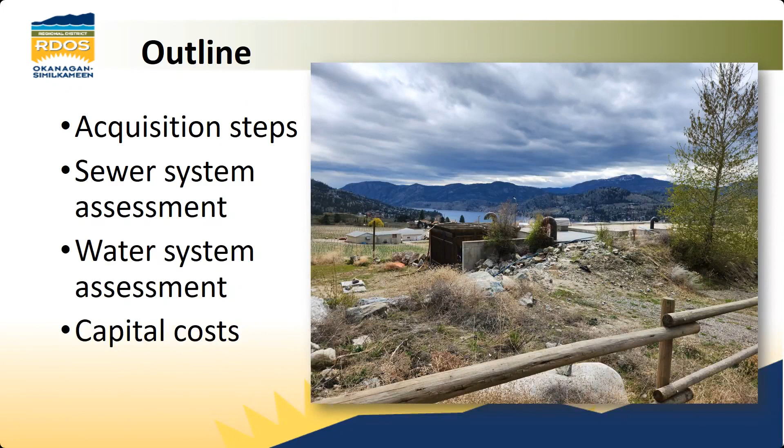Okay, so the acquisition process, there's many steps to it. The very first thing to initiate it is a request to the RDOS to look at the system, and that's been received. We've proceeded with the engineering and financial assessments, which was the main first step, so we need to understand what the current conditions are and what upgrades would be required.

After that, we start working on all of the other details: the liabilities, the risks, and discussing things with the province and all of the other parties involved. Then we go through the other parts of the process, such as when we would come out and do the assent process, the bylaws, and then work on the transition plan. So right now...

I'm going to be presenting on the engineering and financial assessments. This is where we look at the existing infrastructure, and all the capital costs required to bring the systems up to compliance to meet the current regulatory standards. Well, I have to finish getting it ready here, because I thought I was all ready to go, but we're still... Hey, Danny, can you mute everybody?

Hey, Danny, can you mute everybody? All right, I think they got that, yes.

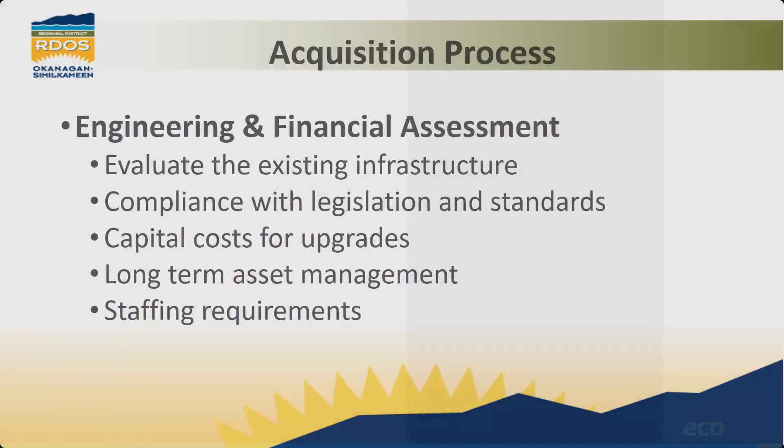Okay, so we start with the Vintage Views wastewater system. It was designed to service 112 lots. Right now, there's 78 connected up to it, and there's 34 empty lots in the Vintage Views sewer service area. Right now, it has a capacity of 65 cubic meters a day because it's only got one module built in right now. It was designed to have 3 modules, to handle the anticipated flow of about 195 cubic meters a day at full build out.

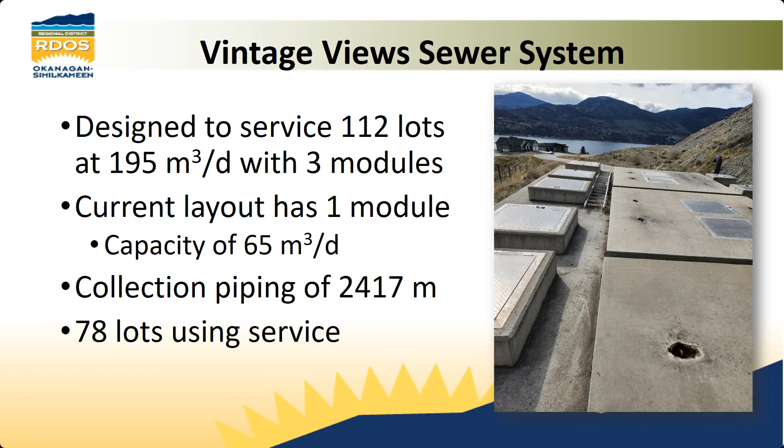So Ecora did an analysis and looked at what the demand would be based on the typical wastewater that would be generated. The subdivision servicing bylaw that the RDOS has, bylaw 2000, which was active last year when the assessment was done, sets the daily need of every person at 450 liters per capita per day. Using that and the estimated number of people per house, Ecora generated a system design flow of 116 cubic meters a day, which is actually less than what the system was initially designed for.

Just as a side note, our subdivision bylaw was recently updated, and our actual new flow is actually 350 liters per capita per day, so we can actually increase the number of connections there.

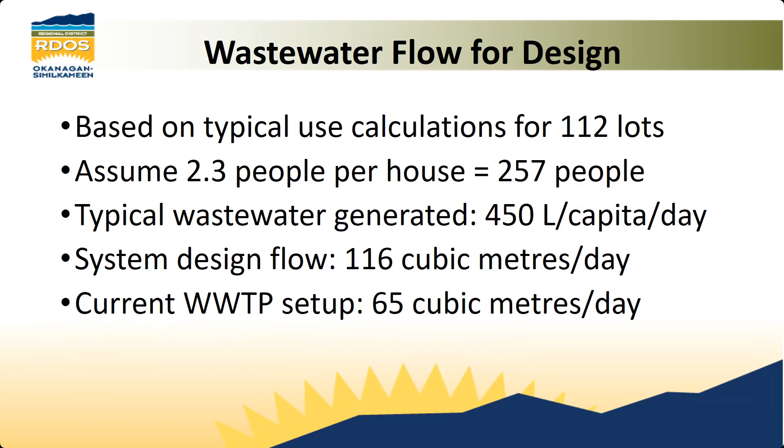So here's an image showing how different parts of the area were connected into the sewer. The first part to come on was the Apple Court area, which includes Apple Court, One Quail Place, and Apple Road. It comes down by gravity into the wastewater treatment plant there.

And then there's 3 areas of Vintage Views that have been built over the years. Phase 1 was built around 2008, and then phase 2 and 3 followed over the next decade.

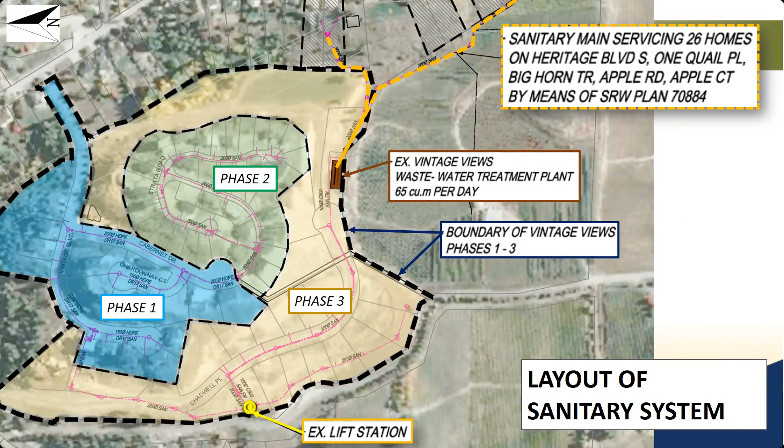So this is a schematic overview that Ecora put together. It's in the report as well, and it shows the basic flow of wastewater through the plant. Wastewater comes in by gravity through gravity mains from the area in Apple Drive and Apple Court, and the rest of it - all of the wastewater is collected and then treated there.

After it goes through the treatment, it goes out for disposal into the infiltration field, which is on the nearby property. Right now there is a newer infiltration field that was put in 2019. There is an old one, but that is blocked and no longer in use - there's a new one that was installed.

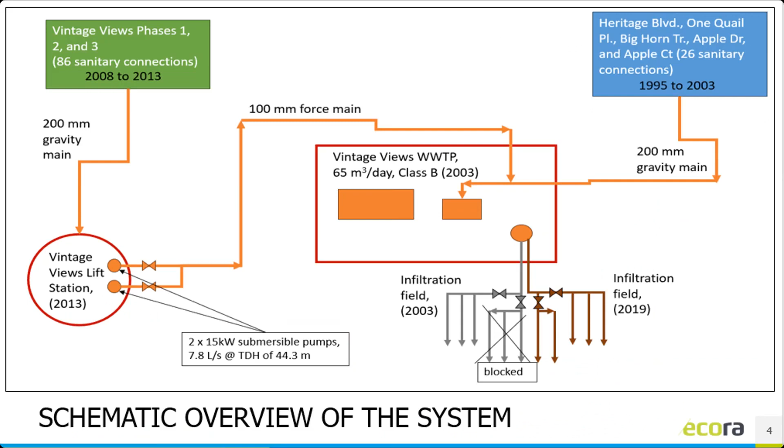So wastewater regulations - there's multiple regulations dictating how sewer systems are run, depending on the size of it. Given the size of this one, it falls under the Environmental Management Act, the municipal wastewater regulation. Right now there is an operating certificate issued for it, but the infiltration gallery, the infiltration field that's currently being used isn't on that registration, which is why it's out of compliance. So re-registration is required for the wastewater system.

The process with the province typically takes 2 to 3 years right now to go through that entire registration process. And the one thing that's different with wastewater than it is with water is there's no provincial oversight body for the operations. With water, you have IHA, that is the oversight for operations, whereas with wastewater, there isn't an oversight body for operations.

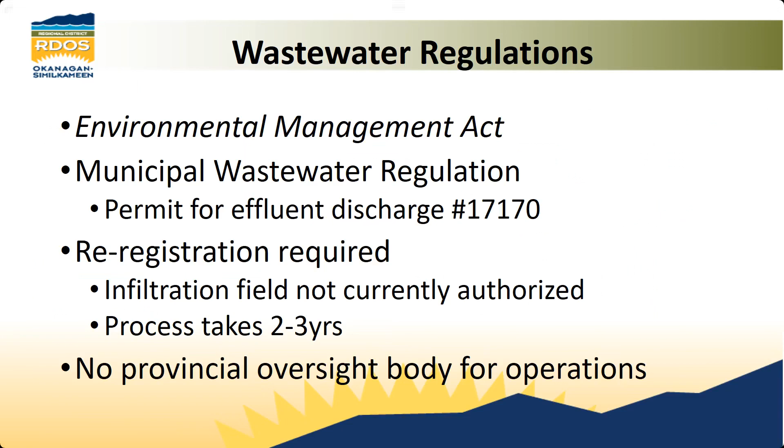Because it's Class B, there isn't a nitrogen or phosphorus level required. But the fecal coliforms are supposed to be under 400, most probable numbers per 100 milliliters.

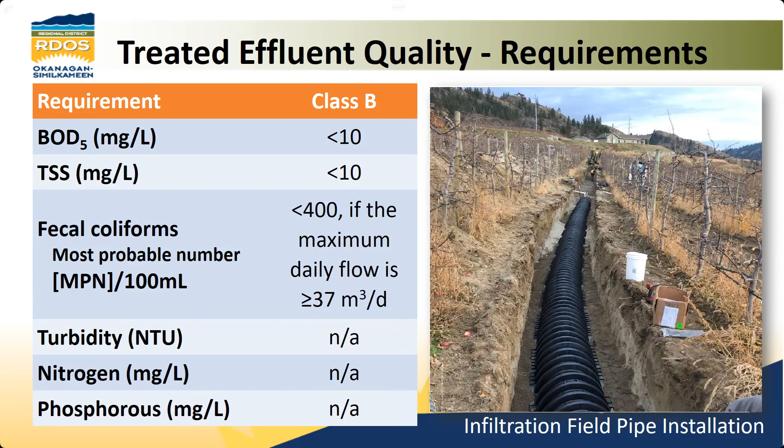The required monitoring that needs to be done on a treatment plant like this is laid out on the screen there. There's supposed to be measurements for flow twice per week at minimum. There's various samples that have to be done and analysis done every week. There are some things that have to be done twice a month or more infrequently. There's also some things that have to be done that aren't included on here, such as a metal screen that typically has to be done annually. That's a pretty common thing for wastewater treatment.

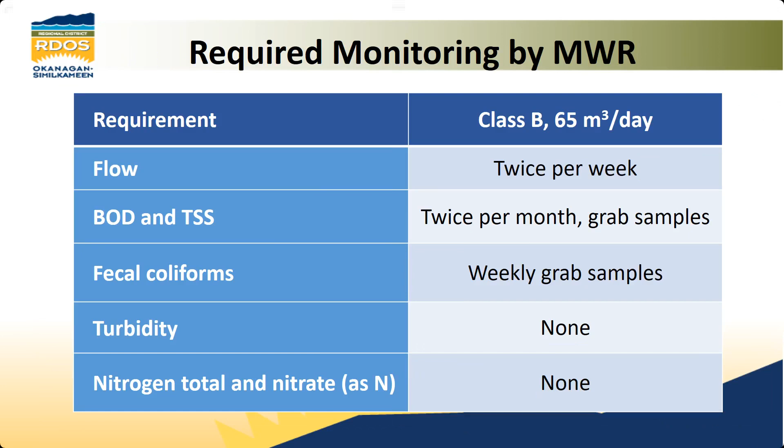So in looking at the coliform data, the report did have data from 2021, 2022 that showed a lot of exceedances in the coliform data. This is the 2023 data that I pulled online from the provincial database, and you can see from that there are still significant exceedances in the amount of coliforms. So this is one of the major concerns with the system, and that additional treatment is definitely required.

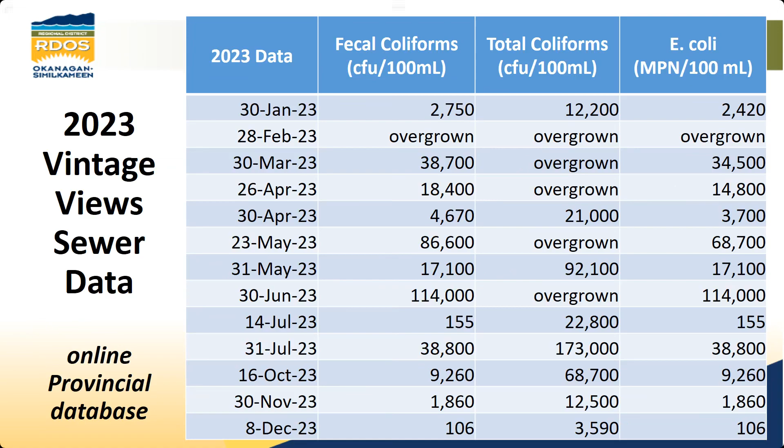So what do we need to do to meet discharge standards? We need to add more treatment. ECORA has recommended the addition of membrane filtration to the treatment plant. Disinfection processes are also going to be required because of the level of coliforms and the volume that's being discharged.

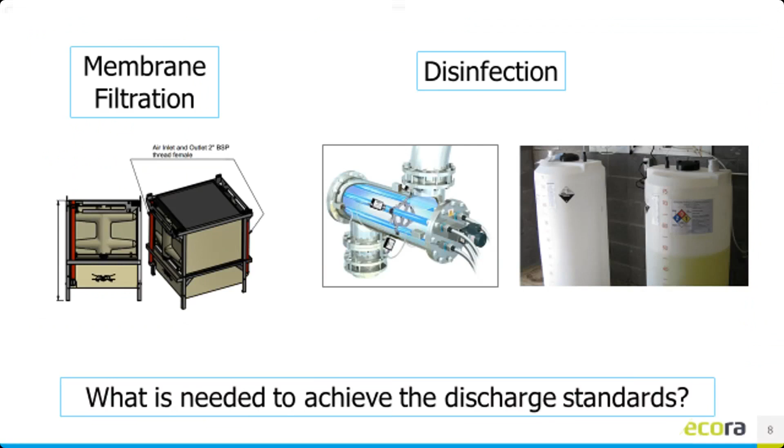So some of the other issues with the treatment plant, in addition to just needing additional treatment, are the things I've listed up there. The operations itself has some issues that need addressing. The inlet chamber has various safety issues and a few other challenges. I'm just going to go through some of those in a little bit more detail now.

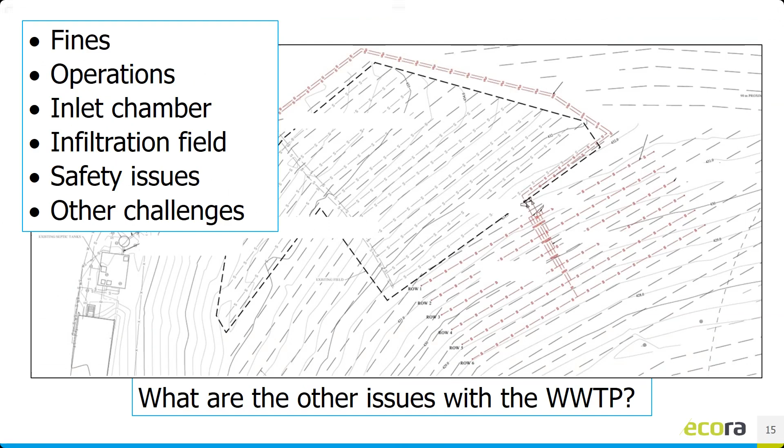So the operational issues include basically SCADA and communications, which are first and foremost for the RDOS. We remotely monitor all of our systems and are available 24/7 to respond to any emergencies. So having good communications and a SCADA system that monitors this constantly is really important. This would probably be one of the highest priorities for the RDOS, to put in a full SCADA control and monitoring system.

The wastewater treatment plant and the collection system both have to be rated by the Environmental Operator Certification Program, or EOCP. That dictates what level of operators are required to operate the collection and wastewater system. The wastewater system has been done, and I believe it's a level 2, but the collection system has never actually been assessed and rated. So that's one of the things that would need to be done.

Record keeping—a lot of the records are very inconsistent, and they found there wasn't a lot of data for analyzing trends. They were trying to do that during the report, and it was very difficult without a lot of good, consistent data.

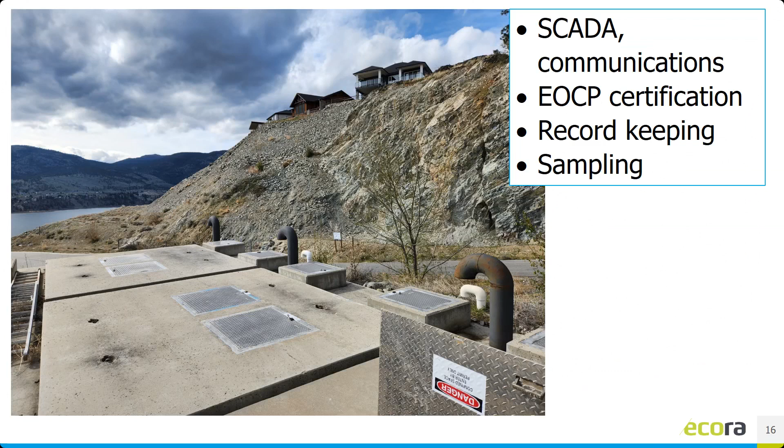So the inlet chamber has a few challenges. It's where the raw sewage comes into the treatment plant and begins the process. This is where there's an initial screen to take out some of the larger materials, and then it moves on into the reactor, which is where the treatment takes place.

There's inadequate volume in this to handle all of the wastewater that comes in. One of the big things that is missing, that was identified, is flow monitoring. It's really important to know what's coming into your plant, so a flow meter is definitely required to be added.

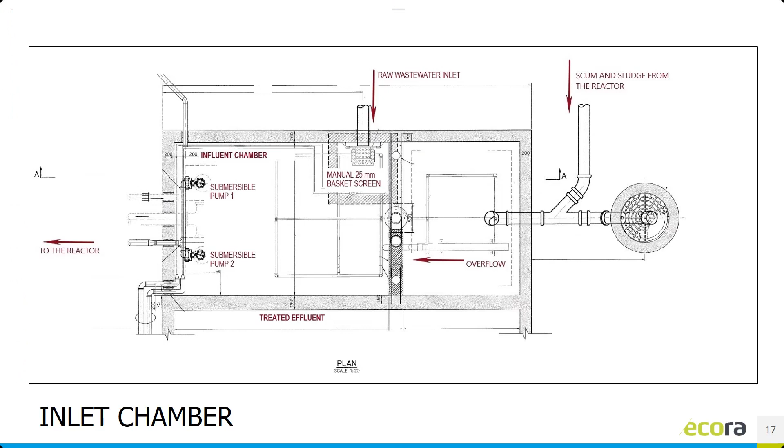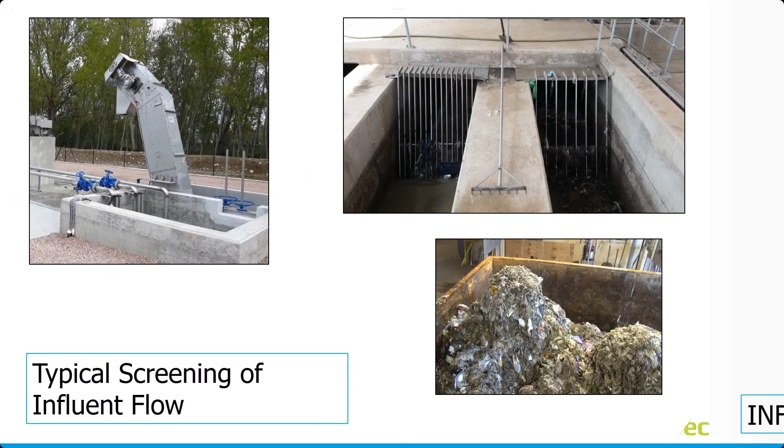So with that location, it is highly likely that additional land would be required in order to fully treat all of the effluent down the road.

One of the other big things is safety. Typically, a wastewater treatment plant is fully fenced to stop any unauthorized access or people coming near the plant to do damage or get hurt themselves. It's an industry norm, so it would probably be one of the things we'd look after fairly quickly—getting fencing done.

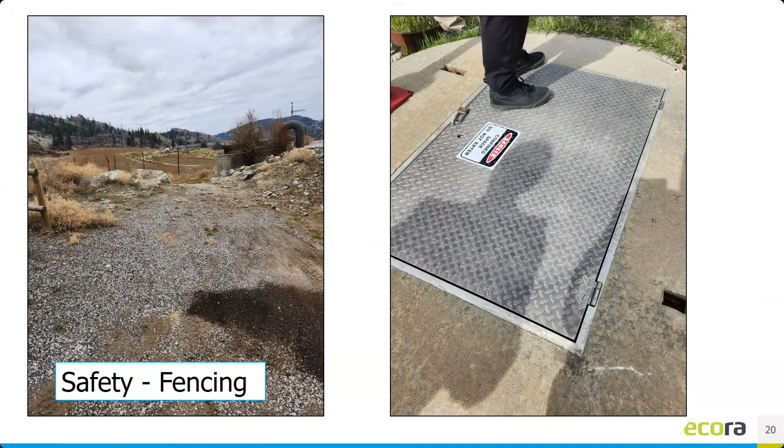This is one of the other safety issues that ECORA identified. In the control room, there is the possibility of gases from the bioreactor area coming into the building, so there needs to be some sealing done. There's no automated detection system for gases in there, and the stairs going down should be covered to prevent ice buildup in the winter.

And the biggest thing is the PLC cabinet, which is where all of the electrical equipment is, in the same room as the microfilter. It's not a good idea to have equipment with wastewater going through it in the same room as electrical equipment, so it's important to have it in different places.

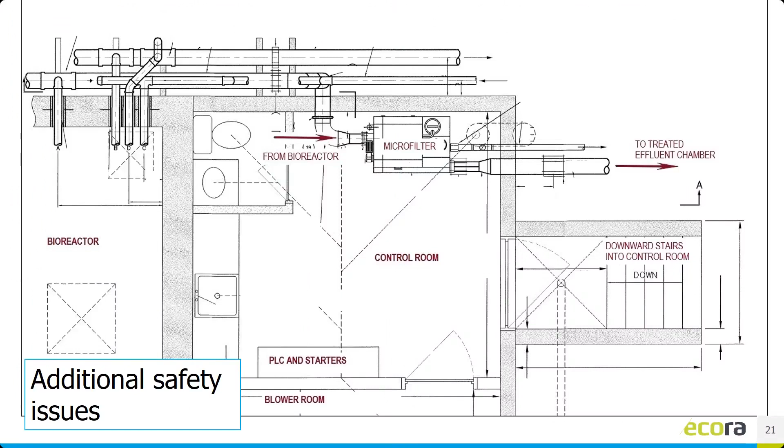A few other issues ECORA identified: there's limited room for expansion, since it's not a very large footprint up there. And the power for the treatment plant is actually coming overland, over top of the vineyard, from the nearby farm. That's one of the things that would have to change, coming instead from a connection right on Chadwell Place.

The other issue ECORA identified is that because it's an active plant, construction has to take that into account. There could be challenges because you can't interrupt it while constructing new things and additions, so you have to keep it working.

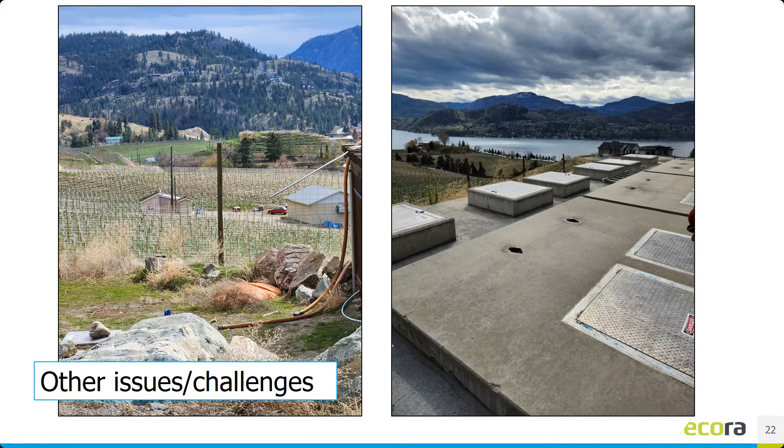One of the other big challenges identified is the inability to hook up new houses to the system right now. There's 34 lots that are not allowed to have building permits because they cannot connect into the sewer. We recognize that this is a significant issue, and it is definitely something that we will be working on.

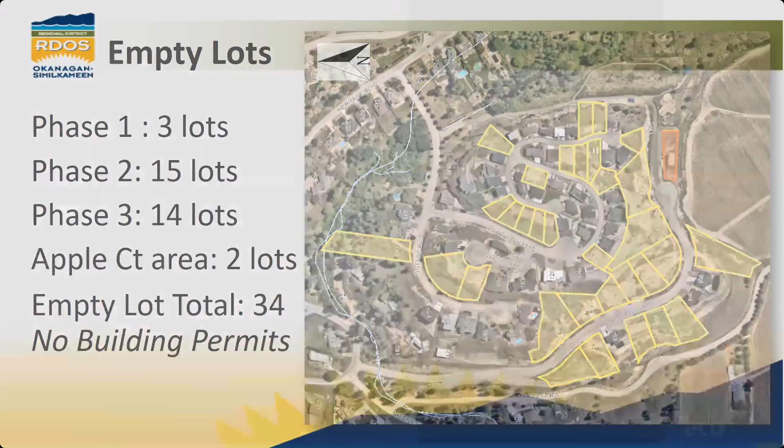All right, so that kind of sums up the sewer section. Now going into the water system.

Regulations for the water system, just like the sewer system - the Water Sustainability Act is the main one, and that's where the water system is issued a CPCN, a Certificate of Public Convenience and Necessity. It basically allows them to have a water system that people can connect up to. The Comptroller of Water Rights is the overseer of that.

The Drinking Water Protection Act dictates the quality of water, and that's what IHA does - they make sure it's potable water. There's various requirements you have to meet in your operating permit, or permit to operate, through IHA, and there's usually conditions you have to meet. The IHA are the ones who enforce the Drinking Water Protection Act.

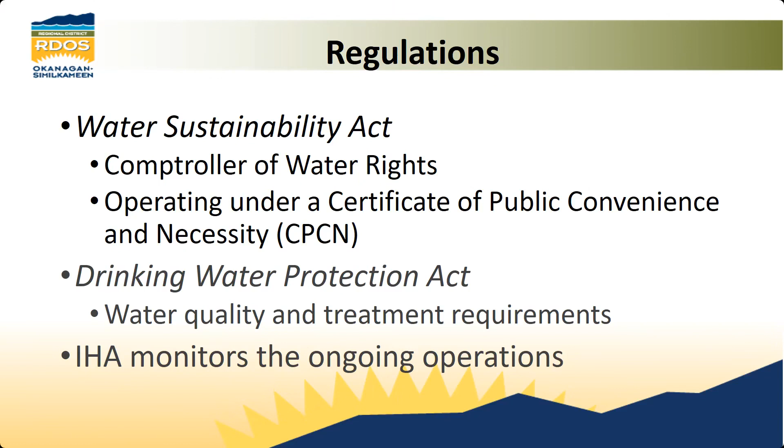Here's some slides walking through the general layout that ECORA has provided. The water starts at the Lakeshore Pump House, where chlorine is added, and then it's pumped up from Skaha Lake to a dedicated main at the Sunnybrook Reservoir.

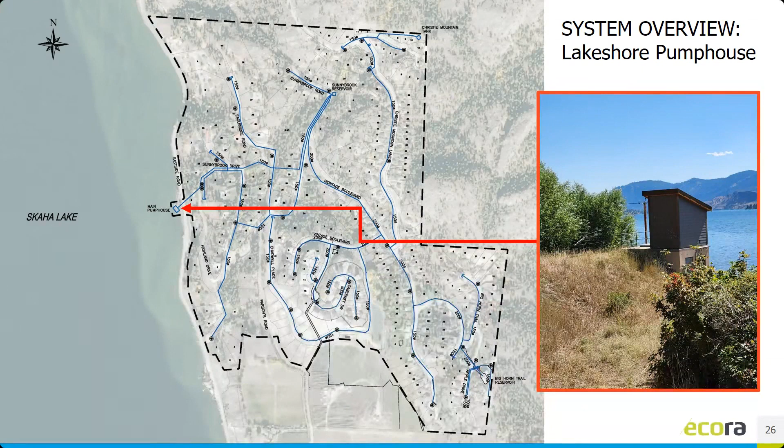Sunnybrook Reservoir is up there, and there's also a pump house at the Sunnybrook Reservoir location that sends water up to the Apple Court Reservoir. The Sunnybrook Reservoir was constructed in 1976, is reinforced concrete, and has a capacity of about 113 cubic meters.

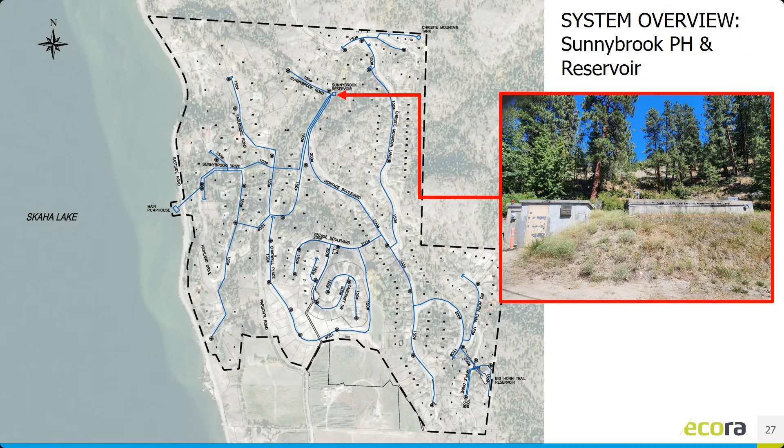The Apple Reservoir is where it gets pumped next from the Sunnybrook Pump House. It was constructed in 1989 and has a capacity about 4 times larger, at 573 cubic meters.

From this location, water flows by gravity into some nearby houses, but it also gets pumped up to additional houses on Apple Court - I believe 12 houses - via the Apple Court Pump House right there.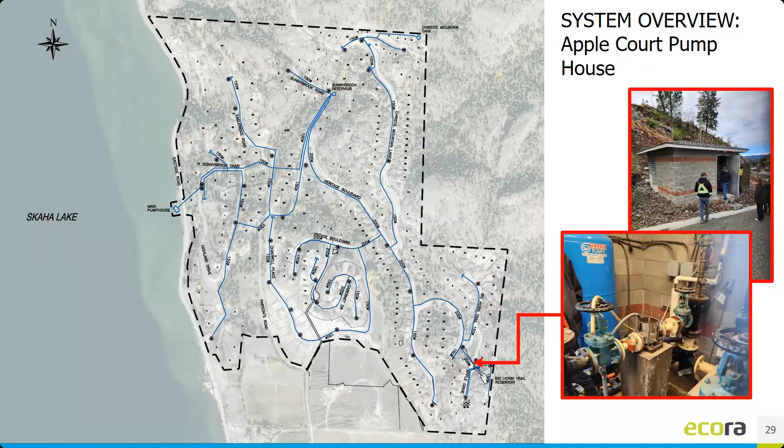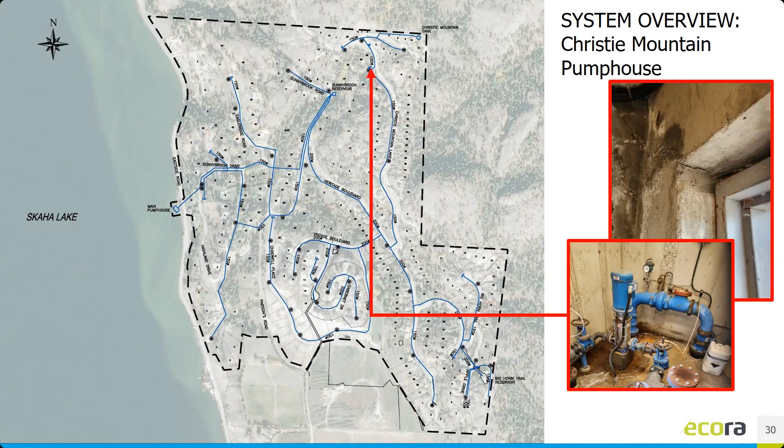Water also flows down to the Christie Mountain Pump House, where it's pumped up to the Christie Mountain Reservoir, which is the steel tank way up at the top - the highest part of the system in elevation.

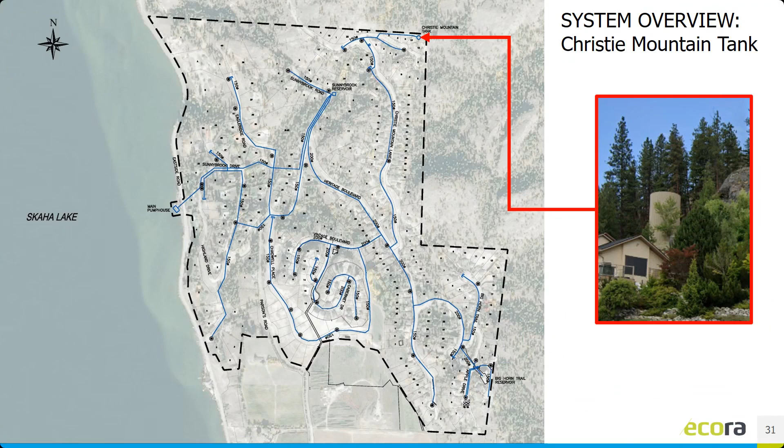The water utility has 5 licenses listed, with a total capacity of about 2,253 cubic meters a day allowed for the utility. The calculations ECORA did on the theoretical demands actually meet up quite well with these water license amounts.

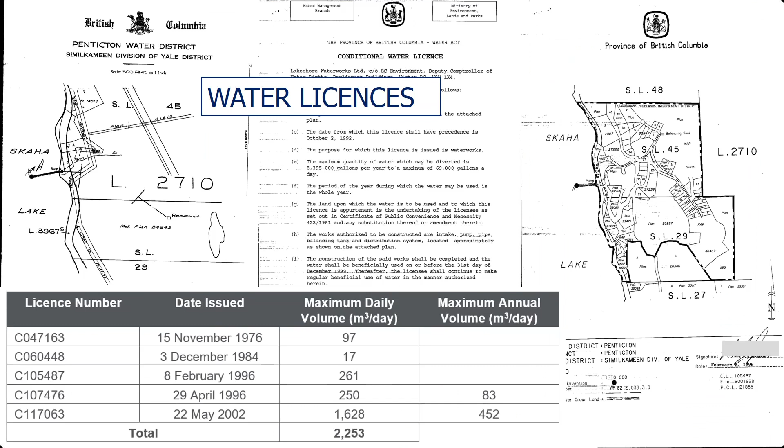Some of the issues ECORA identified are the pumping capacities. Several pumps are not big enough to adequately handle the demands - the Sunnybrook Pump House and the Christie Mountain Pump House both have pumps that are too small and need upgrading. The one at the lakeshore itself has adequate pumping capacity, which is really good since that's the source. The Apple Court Pump House, which pumps up to the 12 houses, is also very good for the amount it's needing.

For fire demand, the RDOS bylaw has a specified rate of 60 liters per second for low density residential single family dwellings. ECORA ran all the calculations and determined the system needs about 302 cubic meters of storage for fire protection. Right now, the current flows from the fire hydrants are well over 60 liters per second in some places, but in others it's not sufficient - around 30 liters per second.

Some of this can definitely get fixed with higher pumps, but the big thing will be additional reservoir space. The Apple Court area is only 3 liters per second, so the houses up there have to actually have sprinkler systems.

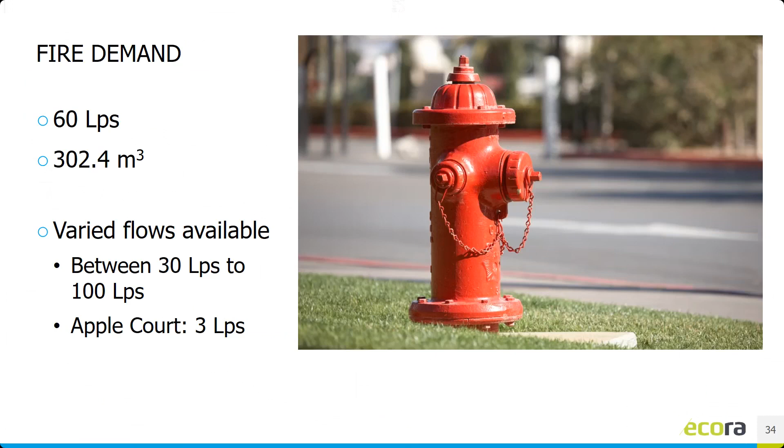For the reservoir volume analysis, ECORA calculated the theoretical volume should be 1,156 cubic meters, looking at the fire volume, the balancing volume (day-to-day demands), and the emergency storage, which is a combination for fire or daily demands to meet the peaks. Across the 3 reservoirs, there's a deficit of about 220 cubic meters in order to meet the theoretical demands, which means another reservoir is required.

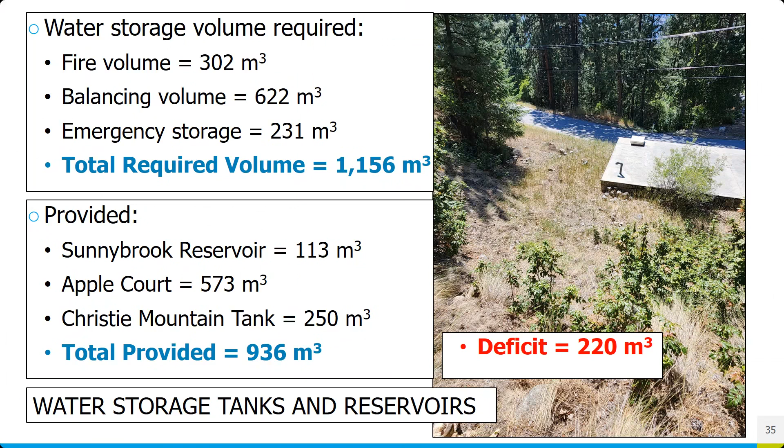Just a little info on the province's drinking water treatment objectives, the 4-3-2-1-0. This includes the reduction of viruses, protozoa, requires 2 forms of treatment, and requires low turbidity for the water. The other main part is that it requires 0 fecal or total coliforms in the drinking water.

One of the things that has come up is in the summer months, the system frequently has positive test results for coliforms. It is unknown right now if the chlorine has sufficient contact time to adequately treat it before it reaches the first customer. So one of the first recommended steps is to do a chlorine contact survey study to make sure there is sufficient contact time.

But right now, the system does not meet the 4-3-2-1-0 because there is only one form of treatment, and a second one is definitely required.

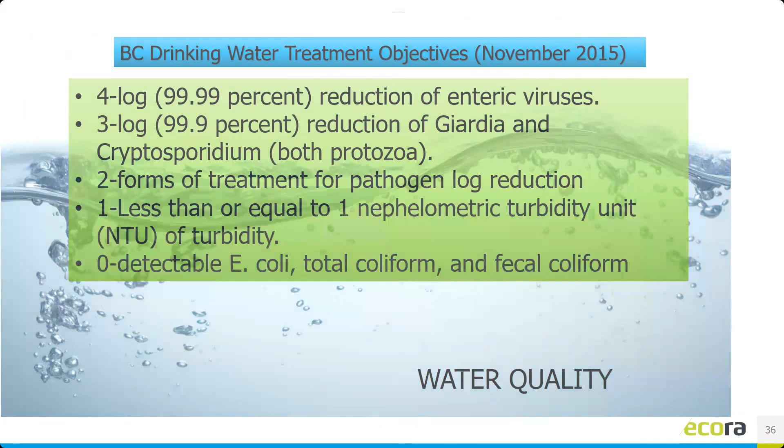So what's required? A water treatment plant. ECORA estimates about a 2.5 million liter per day water treatment plant is recommended, with media filtration and UV disinfection, followed by chlorine to maintain a residual through the whole distribution system.

The key part of a water treatment plant is acquiring land, because right now there isn't a location to put one.

The water system itself has many cosmetic issues due to its age, but there's also many safety and operational concerns. ECORA looked at all of the infrastructure and classified the existing infrastructure as poor to fair, so there's a lot of remedial work and repairs required.

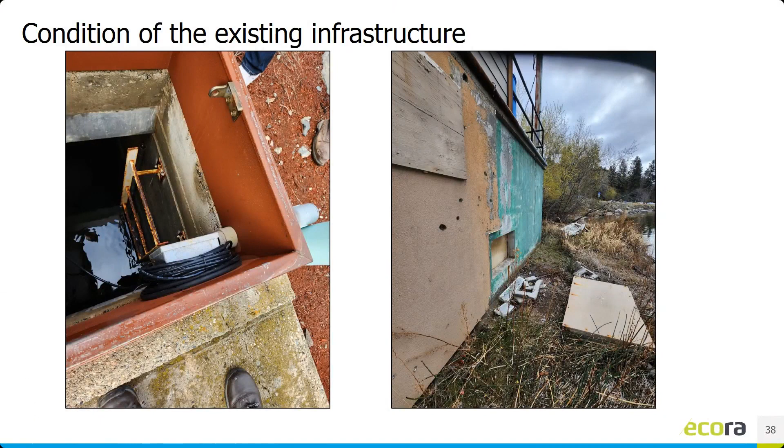Another big thing, just like in the wastewater, is the SCADA and communications. Very important to be notified immediately of any issues that may happen with the water system. The RDOS standards require a certain level of SCADA and communications, so this would be an upgrade that's required.

We have a SCADA system where we can look at all of our water systems, the 10 of them, and the sewer system, all on one system. Some of the controls won't communicate properly with our SCADA because they're too old or the wrong type, so some of those would need to be replaced.

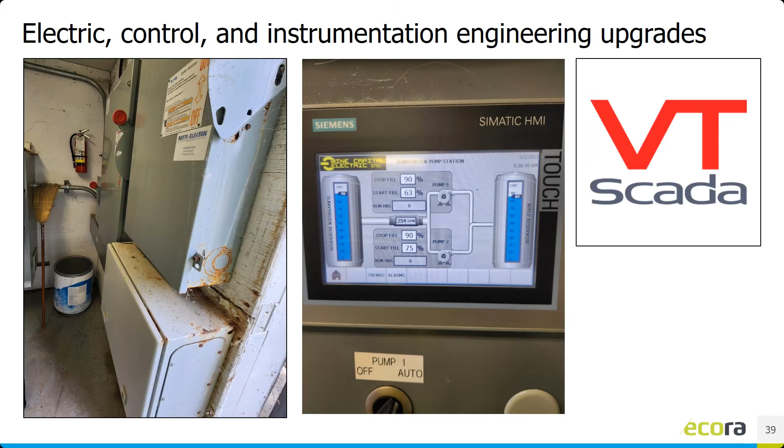There are some other projects the engineer has identified, at Christie Mountain PRV and Pump House building. There's a significant pile of rocks right beside the building, and significant cracking on the building itself. We did not have it structurally assessed at this point, but that's very top of the list to be done, and should be done quickly because we don't know how much damage may have been caused by the rocks along the side of the building.

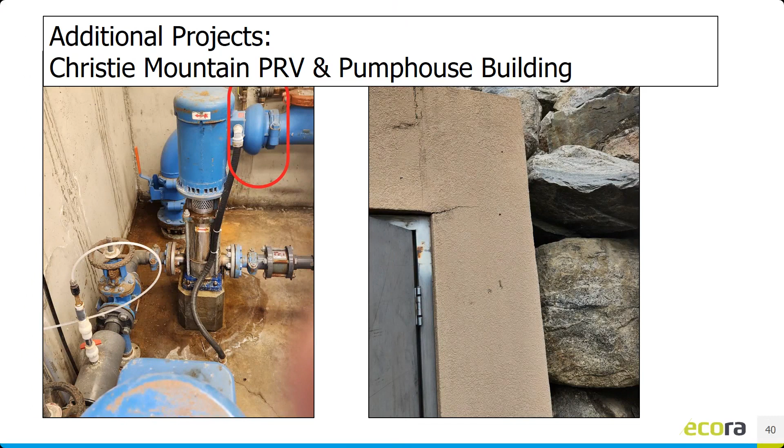The pumping main that goes into the lake and up to the Sunnybrook Reservoir is showing its age. It was constructed in 1976 and made of ductile iron. We don't know its condition, but based on age, our asset management shows this will need replacing. It's one of the top priorities because of the criticality of this infrastructure. If you lose your intake pipe and main up to the reservoir, you're out of water, so it's a very critical piece of infrastructure.

ECORA added the full replacement of this line into the necessary upgrades.

Another issue ECORA brought up was access to the Christie Mountain Reservoir, which is very difficult to access. They proposed we put in a road up to it, since that's the location where they're suggesting we put in a second reservoir to meet full fire flows. It's the highest point in the water system, so it makes sense to put the extra reservoir there, but we need access for construction as well as regular maintenance.

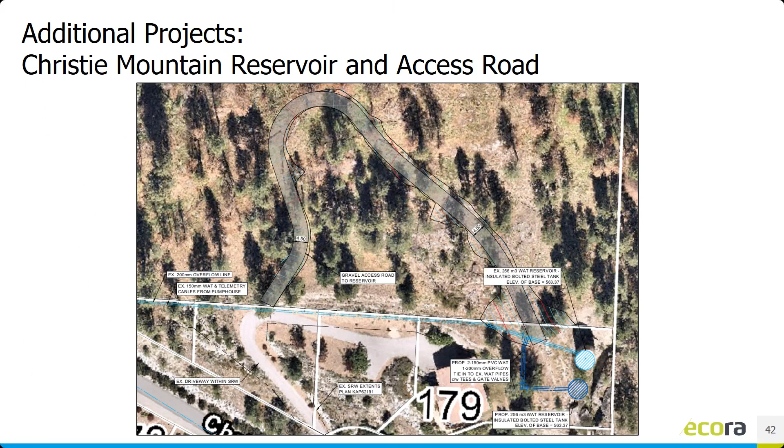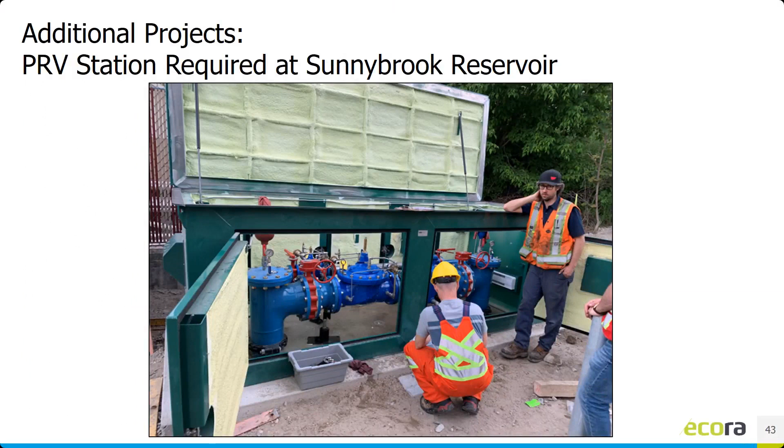They're at the Sunnybrook Reservoir. ECORA is recommending that we also put in a PRV station, so it will allow for the movement of water between upper and lower areas of the system and help with high demands and fire flows.

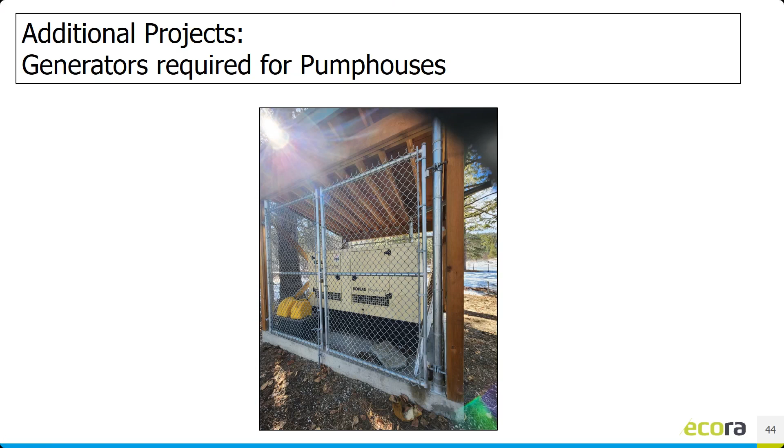Generators are also recommended for each of the pump stations, because when the power goes out, you don't have any water if the generators aren't there. It's something the RDOS has done in our water systems. We've put in backup generators on all of the systems except the newest one that came to the RDOS, the OK Falls one, but that's in the cards for coming along. Generators are certainly a very important thing to have added in.

And water meters. The RDOS is starting to move towards universal metering of all the water systems. It's very beneficial in that it helps conserve water. Everybody seems to reduce their use when they have to pay for it by the cubic meter, as well as it's a great detector for leaks. It's amazing the number of leaks we found on people's property and their home irrigation that they didn't know about, but the meter will tell you that you have a leak.

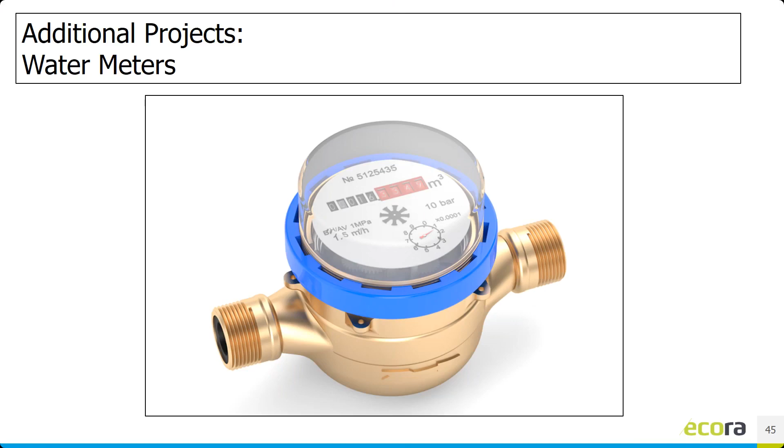All right, so that's a bit about the systems. So the costs. I've got costs for both the sewer and the water systems and what it would require to fix up them all. Now, these are very high amounts. This is kind of a worst case scenario, because we need to know what we have to do if we have to go in and fix everything. So the actual costs will vary depending on labor rates, materials, grants, all sorts of different factors.

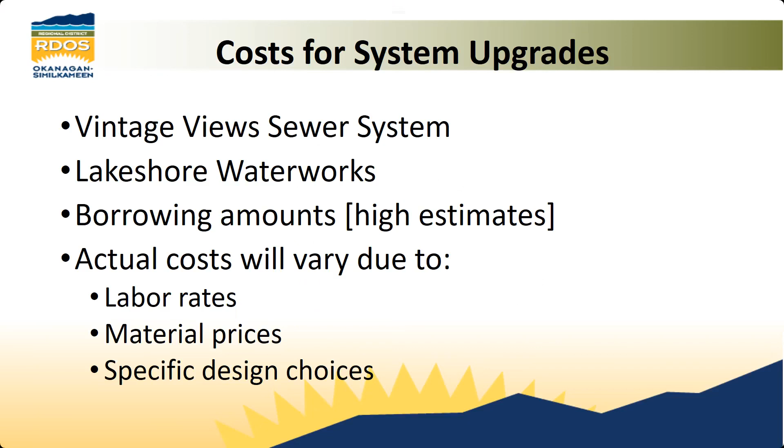But at this point, we've got 40% contingency put on the rates because a lot of things are unknown. We don't have all of the details. This is an educated best guess from the engineers based on the assessment of what they know from past work, as well as all the details that we could see and get from the plans of the systems.

So the wastewater initial capital costs, everything that's required to meet safety, regulatory, and operational standards. What it doesn't include, though, is the cost of ongoing asset replacement. The pipe network is in decent shape, except for the intake pipe. It's still got about 50 to 60 years left because it's all PVC. It's good pipe. The lift station itself also has a significant amount of life left, 15 to 20 years.

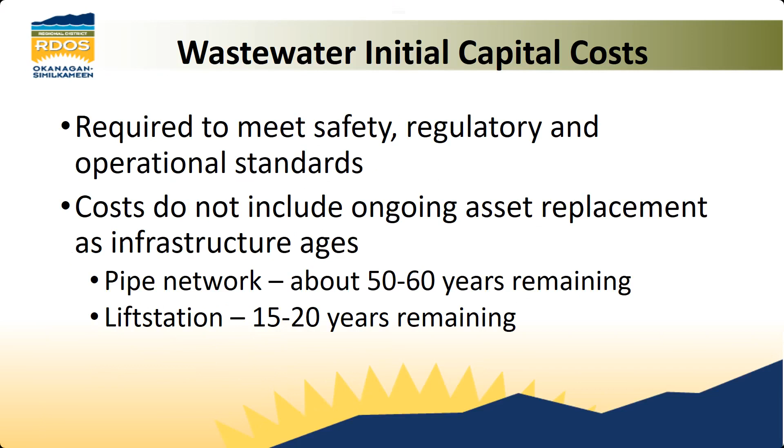So we asked ECORA to look at what the estimated value of the existing assets are. This slide shows, based on the different phases it was constructed in and the wastewater treatment plant, what the current value of the assets would be. And it's roughly about 1.6 million with all of the depreciation to date.

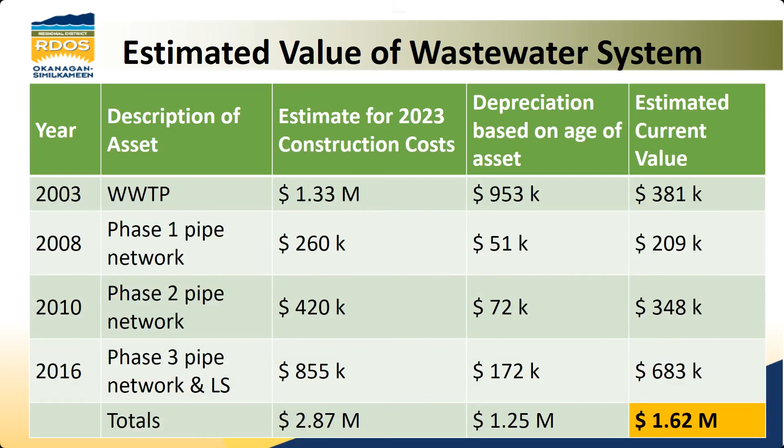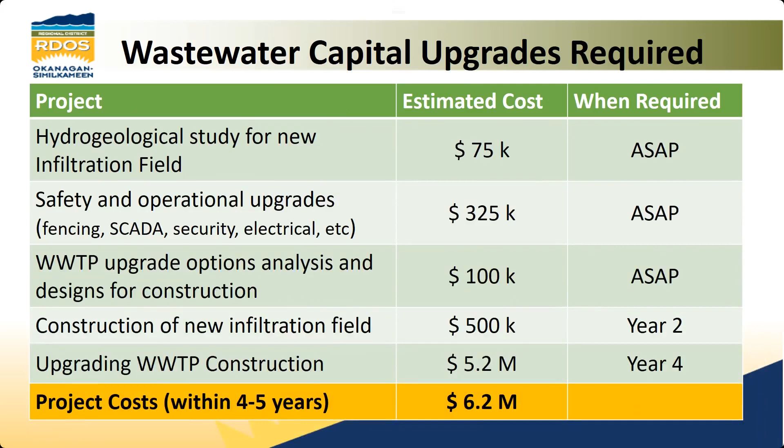So the upgrades required, there's a listing of various things that I walked through in the presentation. It works out to about 6.2 million in required upgrades, which is a significant amount. When looking at what it would cost homeowners if there were no grants and borrowing was done for 25 years, it would be about $3,800 per year for 25 years per lot, which is a significant amount. It's about $55,000 as a one-time upfront payment, that kind of thing. But this is without any grants, having to do it all without any senior government grants.

So the water system also has the initial capital costs. We have to meet the safety, regulatory, operational standards. Similar things with the pipe network. It's got a decent amount of life left in a lot of the pipes, and the pump stations as well, and the reservoirs. The rest of those are in fair shape, so they might need a little bit of replacement maintenance, but not too bad over the next 10 years.

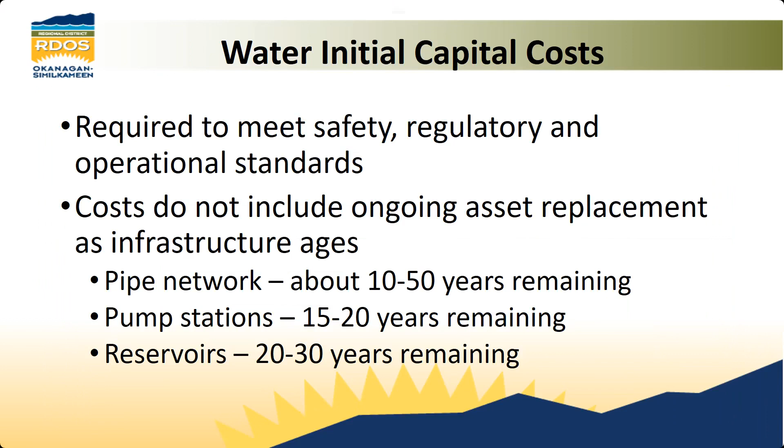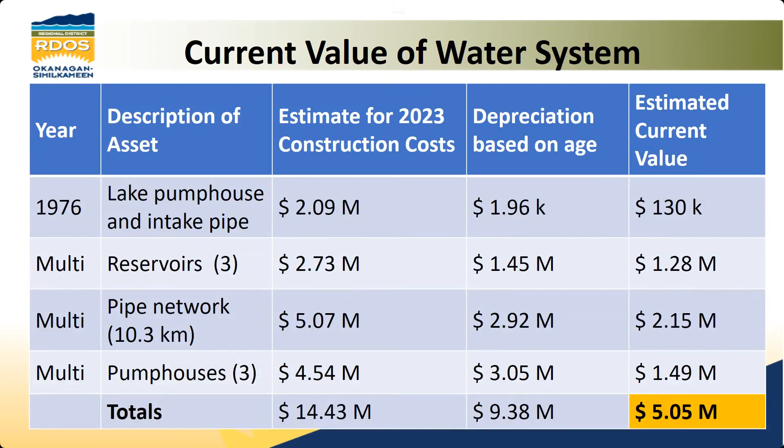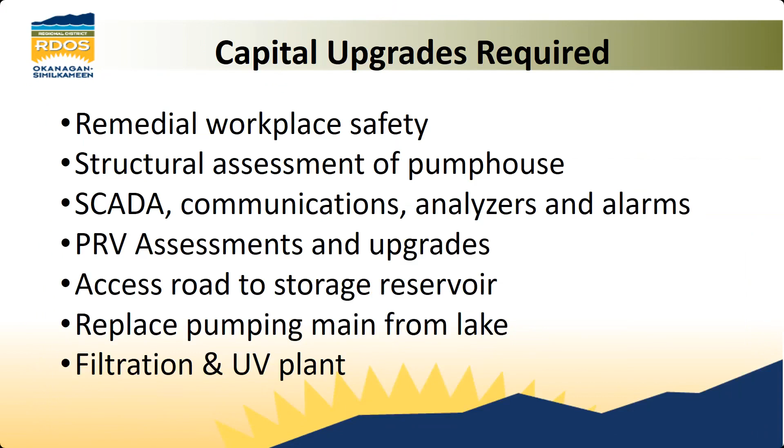So the upgrades required, there was the list that I went through, walked through all the different deficiencies of the system, and it works out to about 13 million in upgrades that are required in order to bring it up to regulatory operational standards. So we figured it would take probably about 7 years in order to get all of it finished.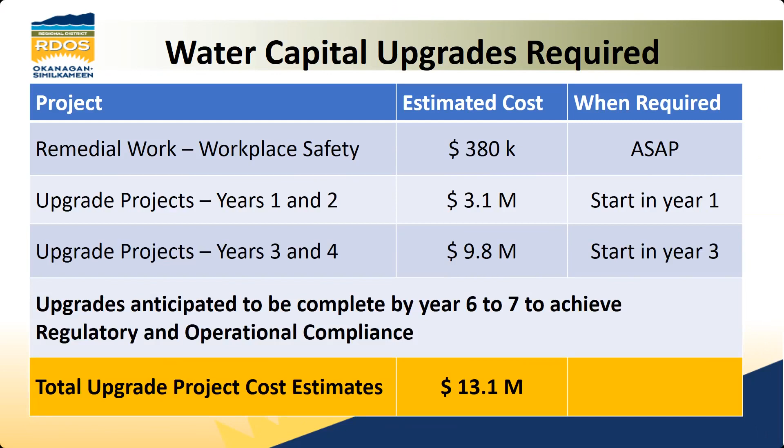So what does that mean for each parcel? It works out to about $2,800 or $2,900 a year for 25 years. This is without any grant funding, any senior government help. So, or it's about $42,000 per property.

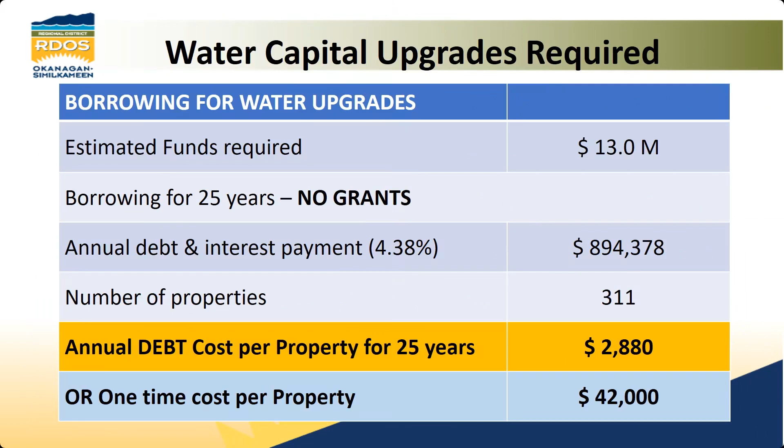So there are operational expenses on top of it because we have to run the systems. The numbers I just showed you were just the capital for replacing and upgrading the systems. Operational expenses, when I look and compare it to some of our other systems, right now I estimate the wastewater between $1,600 and $2,400, and the water system between $1,000 to $1,500 per year. Those are very high level estimates, and they'll be refined and worked out a little bit more in the future.

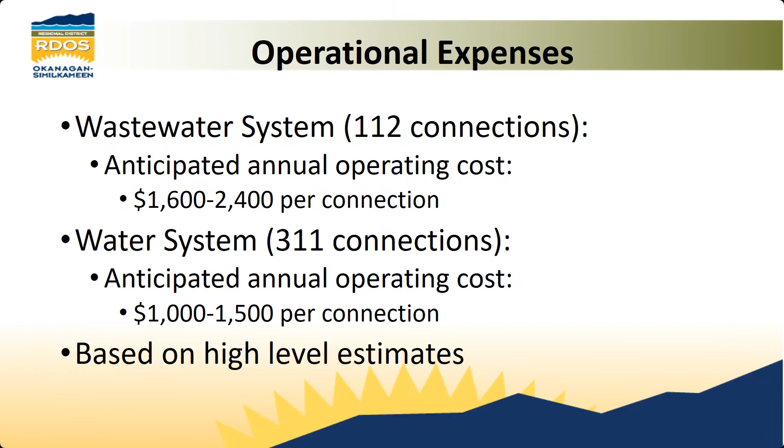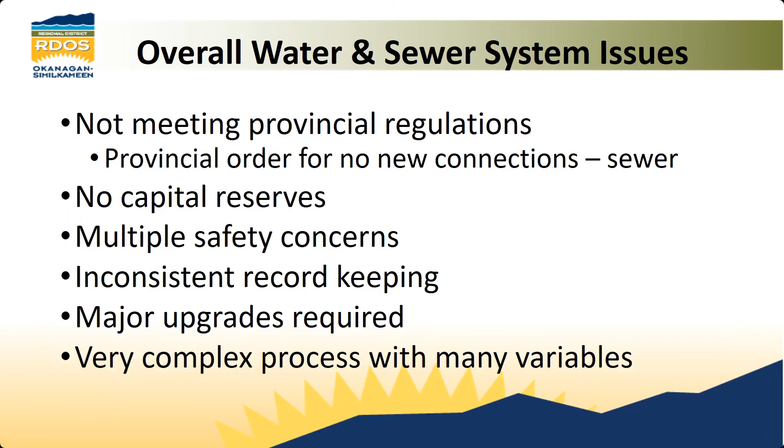So, just to summarize the main issues: provincial regulations are not being met, there are no capital reserves, and multiple safety concerns. We found inconsistent record keeping, and major upgrades are being recommended. This process with these two systems is very complex, with a lot of variables and parties involved. The issues are being discussed with many different parties, including the province, IHA, and the owner, and there's an unknown timeline at this point for a decision from the RDOS board.

But all of the information, as we have it available, will be posted on our Regional Connections site. So I'm highly recommending that people get familiar with the site. It's also a great place for all the other major activities going on in the RDOS as well.